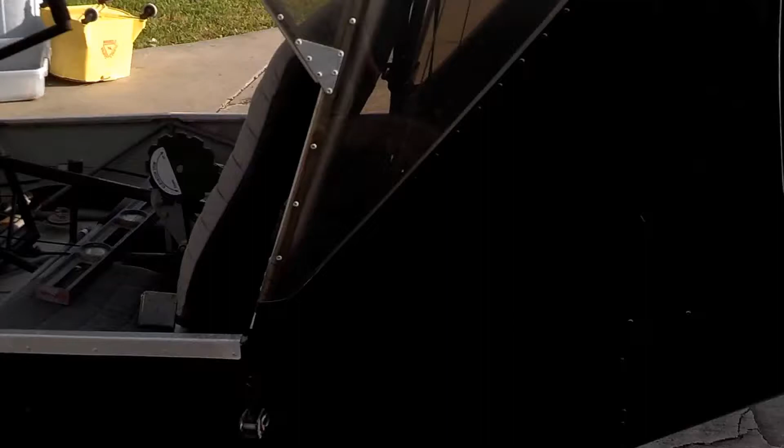So it's off at Rotax Rick's right now, and I've got the fuselage down here at my home in Houston. Usually this would be up in Kingsland where my hangar is, but it had some pretty good options. It has the Tundra tires, and the new updated Rans 9-gallon fuel tanks that go in the wings.

I'm gonna upgrade a few things while I'm at it, and this is already cleaned up, if that tells you anything about it, was actually really barn fresh is how I got it. The previous owner had built it. He was a spray pilot and wasn't really too impressed with the performance of ultralights and microlights.

I guess not after driving AgCat all those years. And so he actually just kind of let it sit. And when I came along and showed some interest in it, he offered to sell it, and I bought it from him. And the thing is that it needs a few updates.

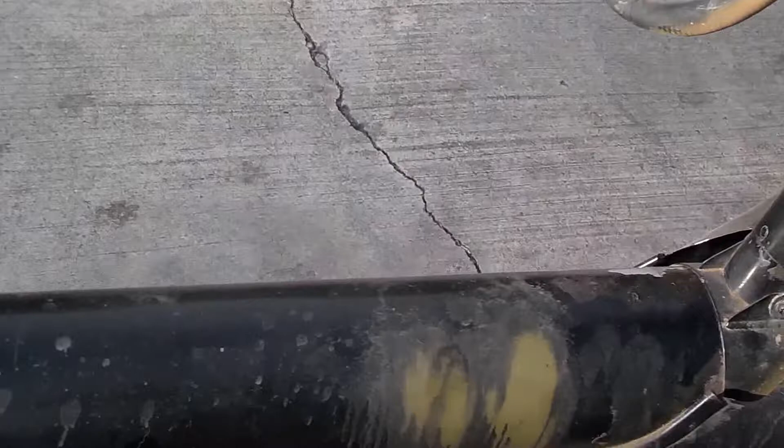The first thing I'm going to do is remove this tail boom and change it out. There's an airworthiness directive on this tail boom from Rans, and right here where it connects to the airplane, where this clamp is, there is supposed to be an aluminum tube shoved inside of this one as a doubler. What you do is you shine a light in there, and if you can see that sleeve, you've got the updated tube.

Well, I didn't, so I'm having to update that as well. So I bought the tail boom from Rans, and I've had it for several months, and I just haven't had the time to get started on it. But I just wanted to let you know it's going to get all new covering, a green and gray paint job and green and gray covering. It's going to be really nice. It's got Tundra tires, like I said. It's going to be a fun plane to fly, and that's about it for now. So stay tuned for more to come.

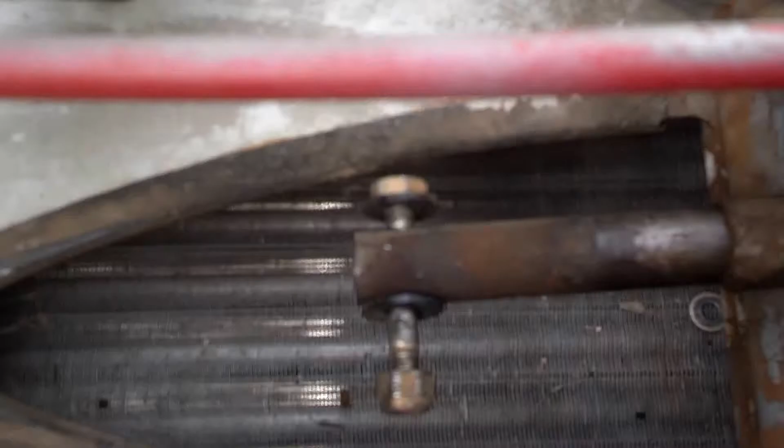Okay, I've been working diligently this morning to get the tail boom removed, and I finally did. It was a little bit of trouble, but it wasn't too awfully bad. The tail boom on the S-12 is attached in 6 places inside, right here on each side and here, and then 4 places that you can see right there.

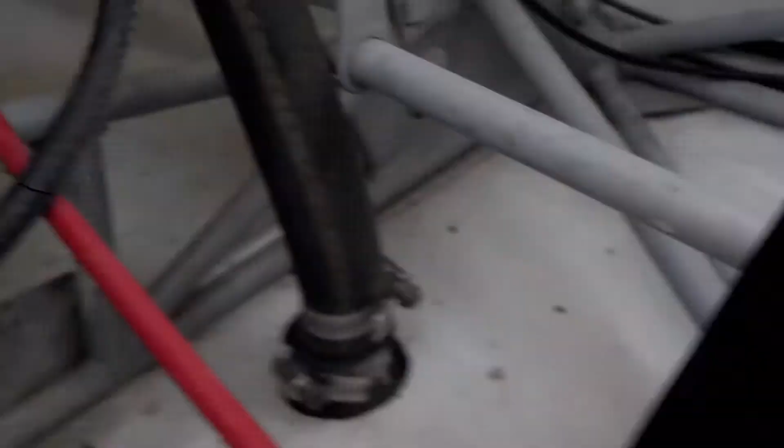And then back in the back, you can see it in the distance, is the clamp that has 2 bolts on the bottom that squeeze it together to get it out. So I have got that accomplished, and the tail boom is removed. Rans was nice enough to send me a new tail boom for only $850.

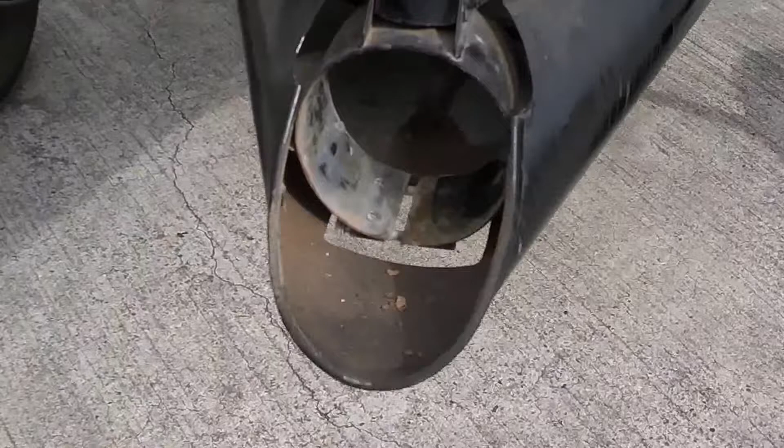If you look inside of this one, I hope you can see the doubler in there. We'll let the camera adjust. You can see the sleeve that's inside this tail boom, and that is what the upgrade calls for. Evidently, when you insert the tail boom and clamp it right here, that's a stress point. So if you have a hard landing, that tail has a lot of moment arm, and it could probably collapse that tube there.

I don't know that they ever had any trouble like that, but I'm assuming that's what the directive is about. I want to take a second to show you some things on the old tail boom. Inside where it was mounted, there's some nut plates in there that are riveted in that I'm going to replace. As you can see, there was some corrosion setting in on this one, so I'm glad I replaced it anyway.

And down here I've got to drill out those pop rivets, remove the builder's plate, and transfer all these holes to the new tail boom. I do have a building manual, an assembly manual for this plane, and so that is my next step.

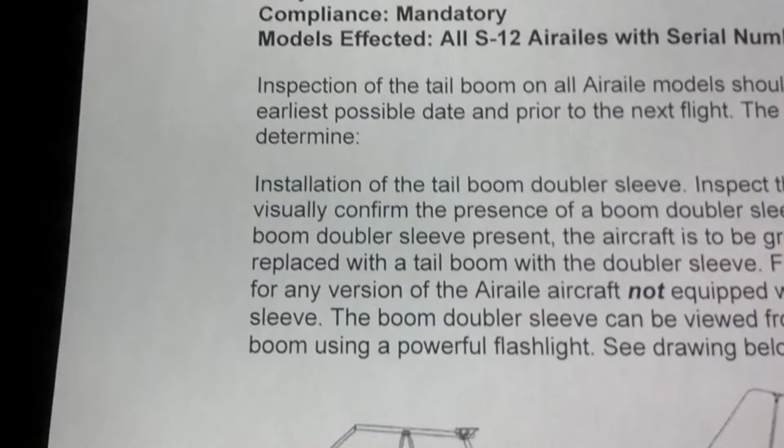I wanted to go into a little more depth on the tail boom for the RANS S-12. This is Airworthiness Directive number 131, issued in 2004 for the RANS S-12 Airaile. It says inspection of the tail boom on all Airaile models should be conducted at the earliest possible date and prior to the next flight. The inspection is to determine the installation of the tail boom doubler sleeve. Inspect the inside of the boom to visually confirm the presence of a boom doubler sleeve. If there is not a boom doubler sleeve present, the aircraft is to be grounded and the boom replaced with a tail boom with the doubler sleeve. Flight is not recommended for any version of the Airaile not equipped with the boom doubler sleeve.

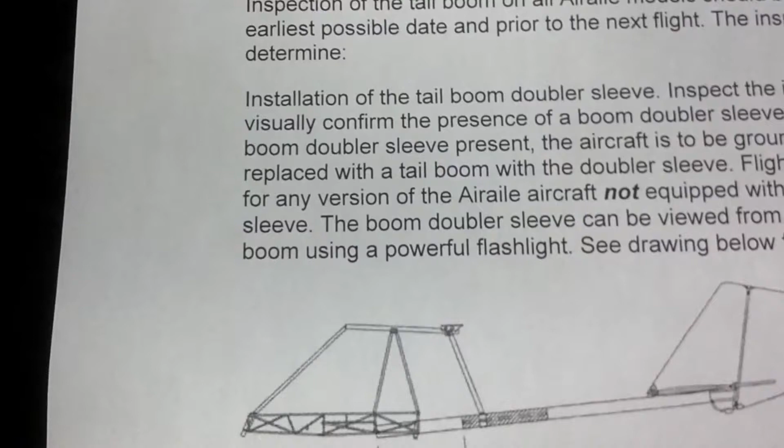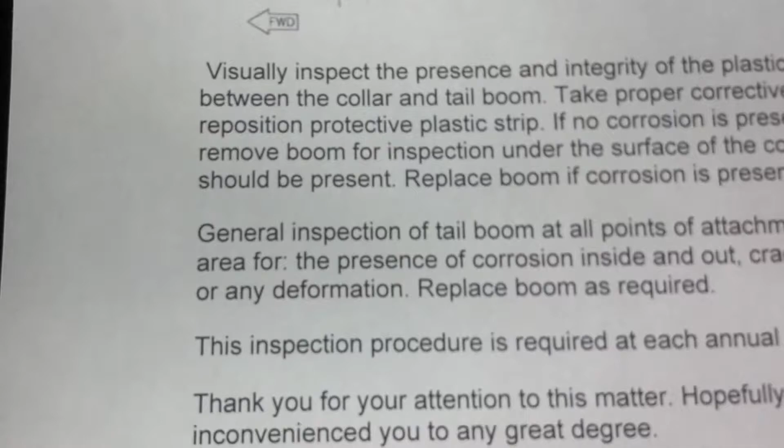The boom doubler sleeve can be viewed from the tail end of the boom using a powerful flashlight. See the drawing for location. This is a small drawing of where the boom doubler sleeve is located in relation to the end of the tail boom. In my earlier video, you can see that right where the clamp is is where the doubler is. They also want you to visually inspect the presence and integrity of the plastic strip between that clamp at the back of the body of the plane and the tail boom, to make sure it's in place and there's no corrosion under it.

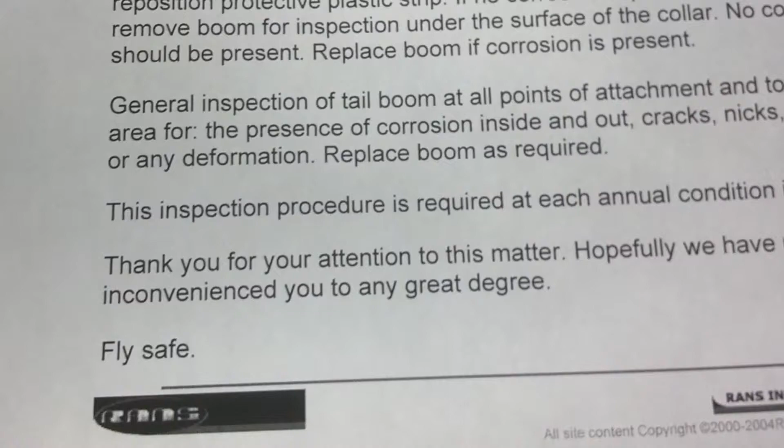I've located this Airworthiness Directive online, it's not hard to find. If you have a RANS S-12, or you're thinking about buying one, you want to make sure this modification is done, because it's expensive and time consuming to do. Thanks.

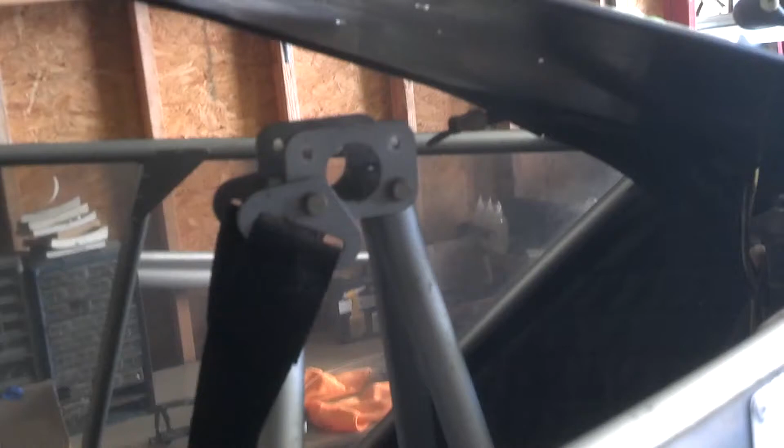As I got to looking at this, I found that my keel tube up here was fairly corroded, so I decided to go ahead and change it out. This is the old keel tube, and as you can see, just like that tail boom I showed y'all the other day, it's got corrosion setting in.

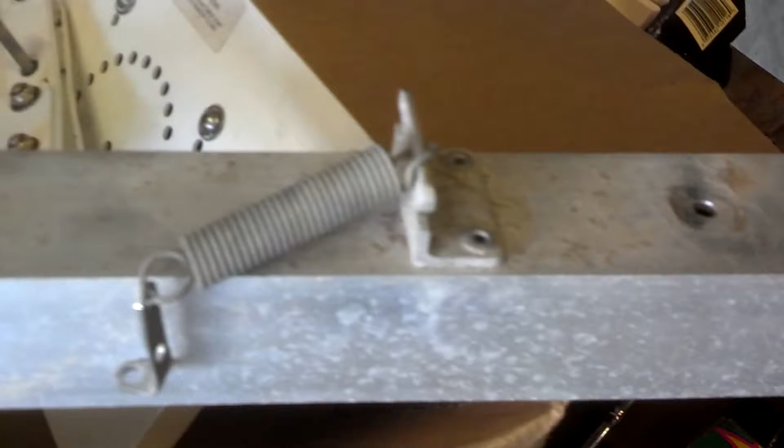I called RANS, and they said they don't anodize these, they sand them square. So if the corrosion wasn't too bad, I could go ahead and re-sand it, polish it up, and get rid of any of the corrosion pits.

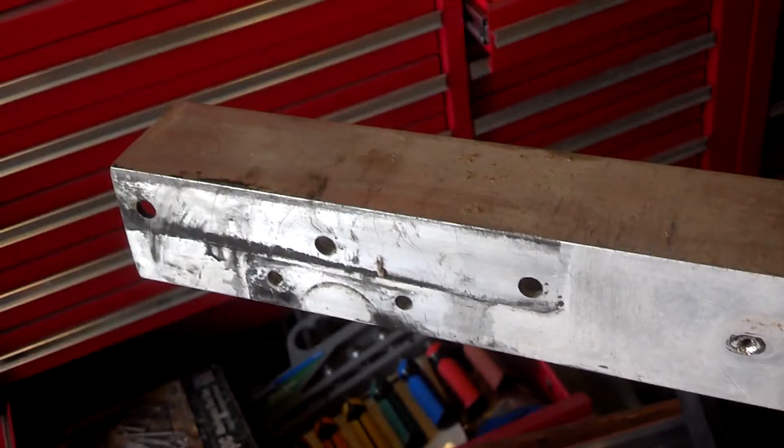Then I looked behind the voltage regulator where it was mounted, and that's some pretty severe corrosion. This is where the motor mounts down on this end, and the rear hole back there is where the wings mount in the back, where the trailing edge spar mounts. Up here in the front is where the leading edge spar would mount. So really everything that hangs on the wings hangs on this keel tube, which made me a little uncomfortable.

So I decided it was only $150 for a new tube, so I went ahead and sprang for one, because while the wings are off and everything's accessible, it would be a simple matter to do. Later on, after everything's in place, it would be a nightmare once the engine's on and the wings are on to try to remove this tube - it would literally have to be disassembled again. So I decided to bite the bullet on the 150 and go ahead and do it now.

So I'm waiting for it to come in, but here's the fruits of my labor - the motor mount removed. One of the things when you're working on a project like this, you want to stay organized. Everything I did is bagged, and every bag has a little note to me on it so I know what it means. Everything is in this box, in this bag, for reassembly.

I ran across a few fasteners that were questionable, and I'm probably going to end up replacing those. But for the most part, the rest of the structure looked pretty good - there wasn't any big problems anywhere else. I'm going to have to fit the parachute later.

But I want to do all this before I get it painted, because I want it to be done in the correct order. So anyway, that's today's work, and more next time.

I just wanted to share with y'all my 582 gray head that I sent off to Rotax Rick, and he returned it to me from Red Gold Rotax Rebuilds. This is not the motor that came out of my plane. My motor was kind of donated to him with another motor, and he sent me back this one, which is a Model 99, a blue head engine. But I opted for the gray head option because I don't fly where it's really cool, and unless you're going to fly in cold weather, that blue head can cause you more problems than it can solve.

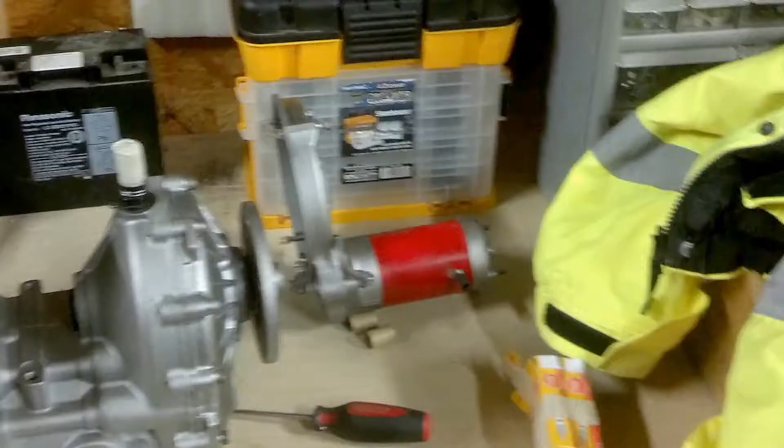This has actually got all the blue head upgrades because it is a blue head, it just has the gray head on top. This thing has double slotted connecting rods. He enlarged the oil feed passages. It's got a C gearbox, and I had the RK400 clutch system put in this machine so that you can start it without the engine being under load. It's also got the electric starter option.

But I just can't tell you how nice this engine looks with this stainless steel paint that Rotax Rick uses. I'm going to spin the motor around and let you see for yourself the quality of work that he did on this. It's just really impressive. So I'm going to spin this engine around and let you see the other side.

All the coils are just clean like new. The carburetors were all disassembled, cleaned, and shot with the stainless steel paint also. And all the wiring loom on this thing has just been wrapped really nicely. You can see what quality and attention to detail he took with my motor, and I can say right now, without even running the thing, that I would recommend his work.

What he told me was, if you like the way it looks on the outside, you're going to love the way it looks on the inside. So I've got to get the motor put back together. The only real problem I had, it was damaged a little bit in shipping, and this plug down here where that piece of tissue is, that was the oil feed line, or reservoir line for the rotary valve. It's made out of pot metal, and it got broken, so I've got to put a brass one in there. No big deal, I can screw that in myself. But all in all, this is just a gorgeous looking engine, which should give me real good service for years to come. I just can't say enough nice things about the way this looks.

It's just gorgeous. I also had Rick do the oil injection delete, as you can see down there, the oil injection block off plate. I'm gonna pre-mix my fuel from some bad experiences I had with Sea-Doos and other watercraft.

So anyway, that's it, hope y'all enjoy this. Anybody thinking about using Rick for a rebuild can rest assured that he really does do nice work. And you talk about great customer service, man, he'll tell you anything you want to know about these engines. He's very knowledgeable and very eager to share his knowledge with you and make you an informed customer, which I really liked.

No more crust and rust. He did a really nice job on the paint, I'm really, really pleased, and he painted the tail boom gray as well.

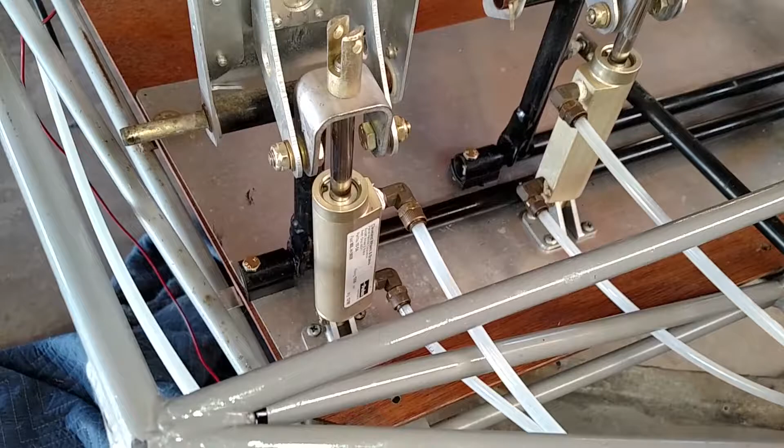Today I'm going to kind of catch y'all up because I've been working on it, and I'm not sure where I left off exactly, but I have been replacing the cable operated brakes with these nice hydraulic units, and I took them all apart and rebuilt all the Parker master cylinders and replaced all the fluid lines, and I'm at that phase. Unfortunately, this was a huge job.

I had to remove the belly pan skin, I had to remove the door uprights and the windshield, which I was going to replace anyway. The polish job that the guy did for me lasted about 6 months, and then the window started to get sticky, and I think the polycarbonate was just so UV damaged that it was not going to ever be good again. So I had already bought another brand new windshield, and I decided to go ahead and put it on.

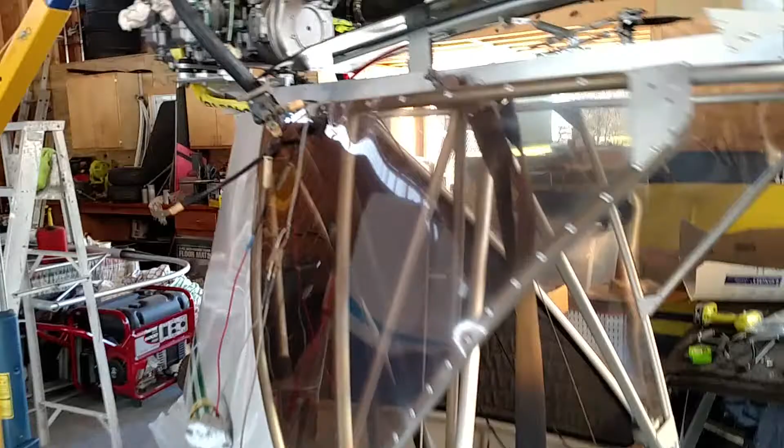Other things I've done since then: I've got the engine mounted onto the keel tube, and I've got all the plumbing done, the exhaust is mounted, and I've been mostly getting organized and prepared to work. As you can see, all the hoses are new. I've replumbed everything, and all is going well there.

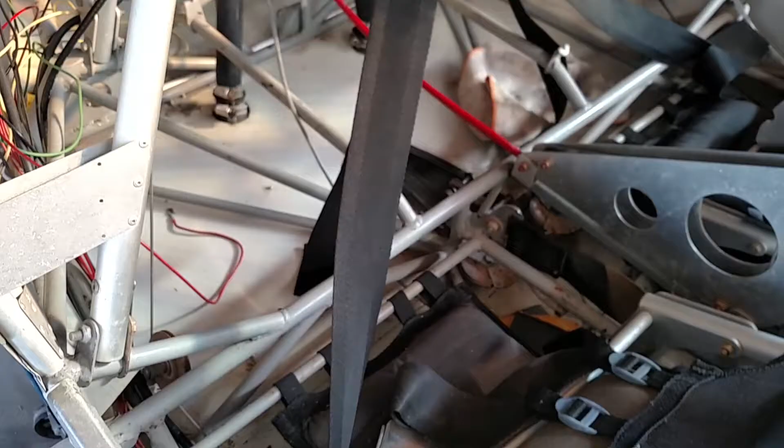But I hit a little snag today with the landing gear. All in all, opening this cage back up and just kind of opening everything up where I can get to it has been a tremendous help, because all the wiring and everything is exposed, and I'm going to redo some of that. So that's where I'm at today.

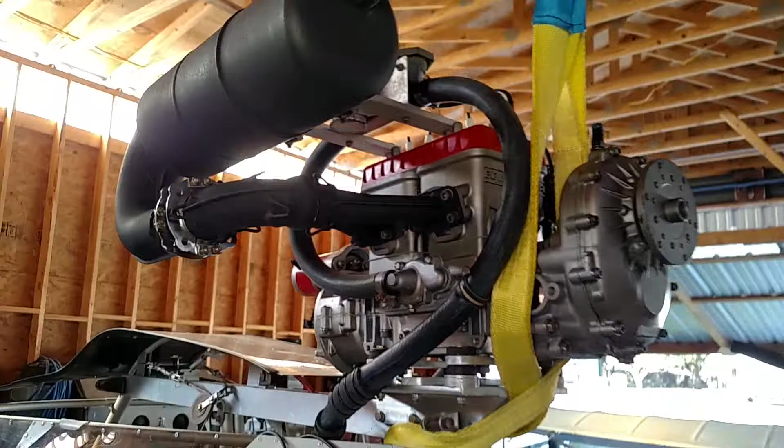I'll give you one more picture of the motor. It's my 582 in place, and the reason that sling is around there is because I'm taking the landing gear and putting the disc brakes on and taking the cable operated brakes off.

So that's about it for this time. It's starting to fall together, and I'm getting a lot more work done on it. I'll have another installment shortly. This is January the 3rd, 2016.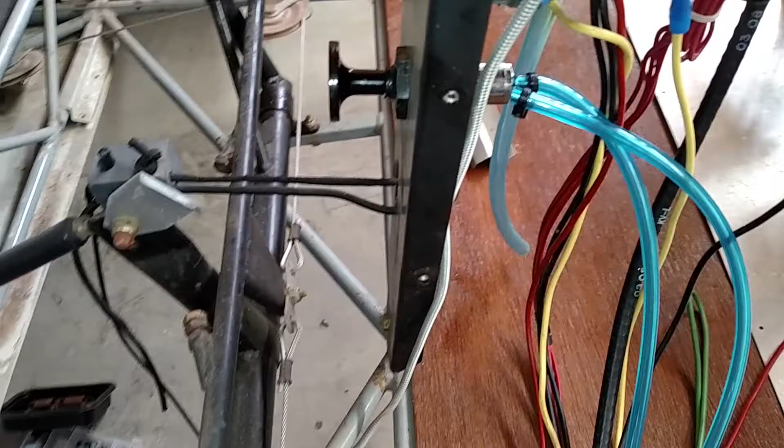I have got the battery box installed with all the hardware. I've got all the brakes bled and everything working good. I've got the primer installed, the new one, and the primer lines run.

I installed a gascolator, pretty similar to the one on my S14, except this time I used the gascolator's instructions, and it says at the top of the gascolator there's a port that you can screw a fitting in to access for a primer fitting. I thought that was a great idea, so I did it. That's my Facet fuel pump that I have not installed yet. That's next on my agenda.

Please excuse the bungee net, that's what's holding the nose of the aircraft on right now while I'm doing all this work. If you come around to this side of the airplane, what I've done so far over here is I've added these exhaust gas temperature probes, and I've added these exhaust springs for the joints in the exhaust pipes. And that's pretty much it.

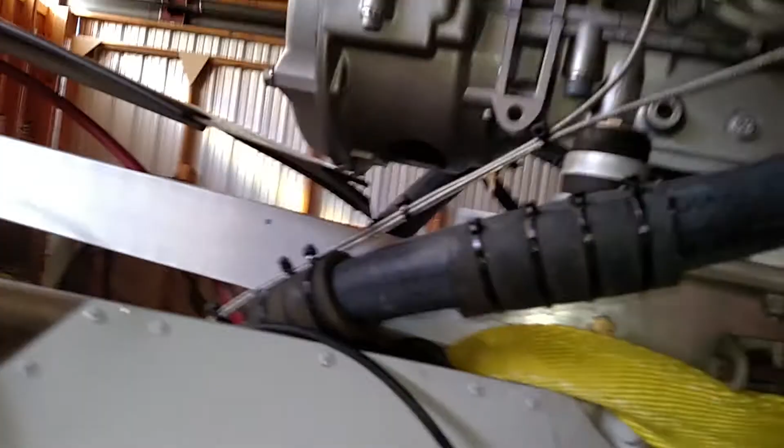I want to take a second to discuss the water cooling of this motor. What I got to talking to Rotax Rick, and we have determined there may be, or may not be for that matter, an issue with the way that the water cooling is plumbed on a Rans.

You see this big loop of hose here that goes up here and around this way, and there's a filler neck up there that you use like a radiator cap. Then it comes down this hose and into this water pump here. It goes up through the cylinders, up into the head, and then on the other side of the motor, it comes out of the head here, and it goes back down to the radiator down below the plane.

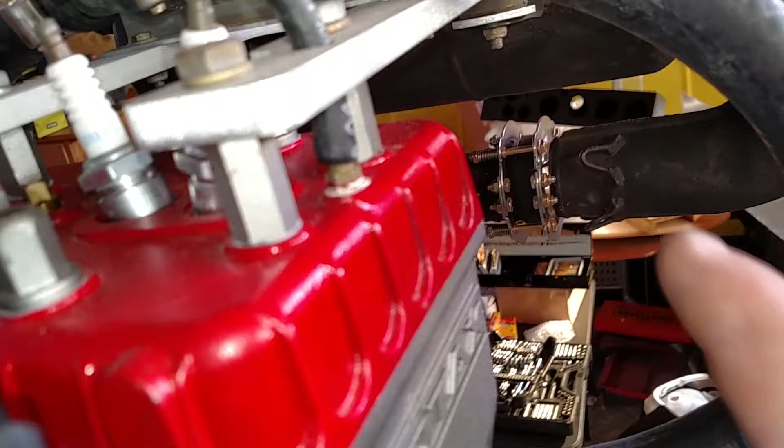The potential issue is caused by this steam line right here. Now, when you quit running a Rotax motor, the hot head can continue, without water being circulated, to form steam pockets. That's why they call this a steam vent. Here is the steam vent fitting that Rotax puts on there, and it sends the air, when you start up, blowing it up through this line and back into the filler neck. The issue is that this is the intake side of the water pump, so you could potentially run air down into your water pump and cause a cavitation problem.

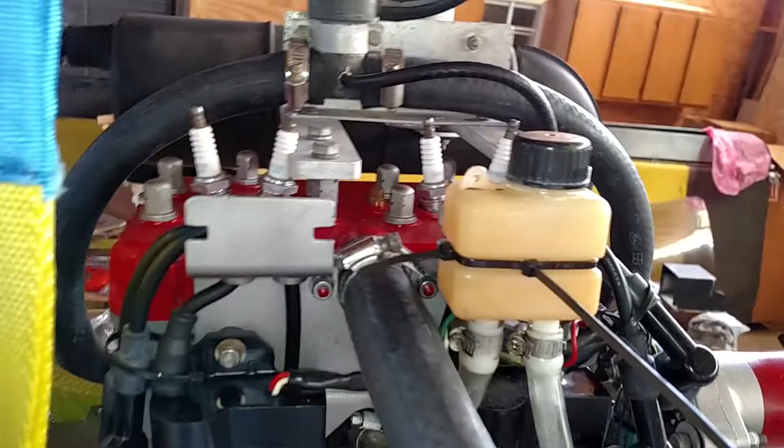Rotax Rick is claiming that is a problem. So what he is suggesting I do, and after investigating it myself, Rotax does recommend that you put the expansion tank on the head side, or the output side, of the motor.

So I'm going to use one of these little Rotax expansion tanks, and get the 90-degree fitting option. This one's just straight out, but you can get one that goes 90 degrees up. I'm going to put this here and do away with this whole loop of hose over here, and go straight into the water pump from the radiator. That will eliminate any potential of air getting into that water pump impeller and causing a problem.

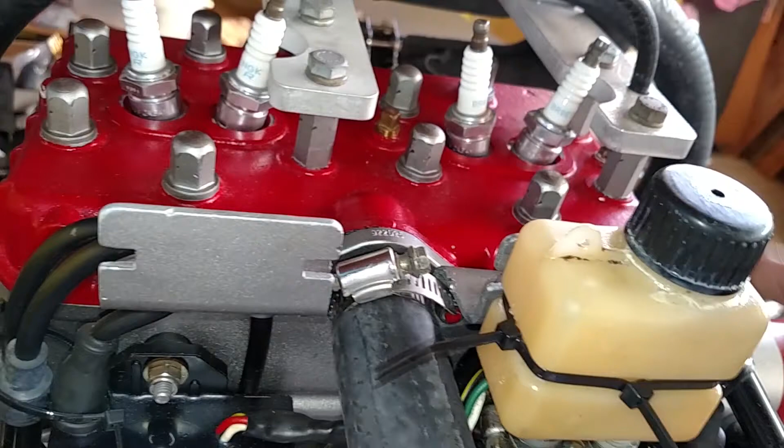Now, for you naysayers who say there are a million Rans S-12s and S-14s flying with this setup and no one seems to be having any problems, well, that may be true. But as Rotax Rick described to me, the most vulnerable part of the head on a 582 is an O-ring. If you have a pocket of air around that O-ring without water to cool it, it can fry that O-ring, and it may not fail immediately, it may take a while.

And so then your engine fails and you blame Rick, or you blame somebody else, when it's actually a faulty installation. So I'm trying to point this out so that maybe it'll help somebody, and they can do what I'm going to do, which is rectify this before it ever becomes a problem.

If you want to use this information, great, but I suggest you research it yourself and come to your own conclusions. If anything I've said here is helpful, well then great, but I'm not a master Rotax guy or anything like that. I'm just telling you what I'm doing on my plane. So if you follow what I'm doing and burn your engine up, don't be mad at me. You still need to do your own research.

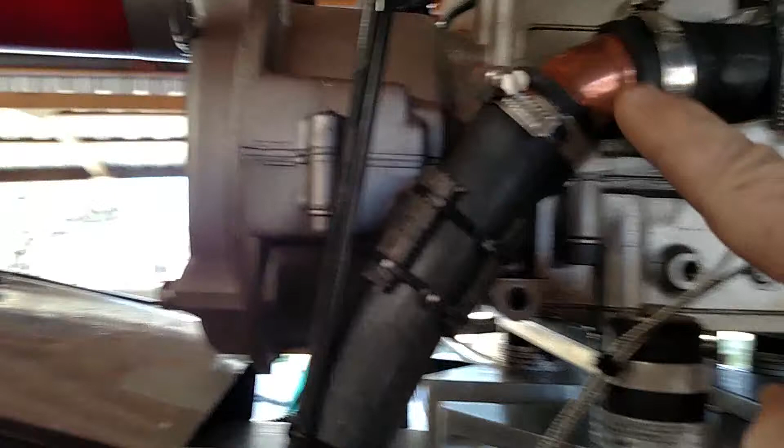You can see right here, this is the tube that comes in from the radiator on the bottom of the S-12. I've got a 1-inch 45-degree copper fitting here, and it goes into the water pump, which is right here. Before, that line would have traveled up here and around on top of the head, then looped back around and come in this way. This way it just does away with that big old loop and the possibility of getting air into your system.

So let's go around to the other side again. What I did here is, where the line used to come straight out and go right down here to the radiator on the output side of the head, I've replaced the fitting that Rans had here, which was straight out, with a 90-degree fitting, and it goes up with a little piece of 1-inch radiator hose to my Rotax expansion tank, and then it goes over here.

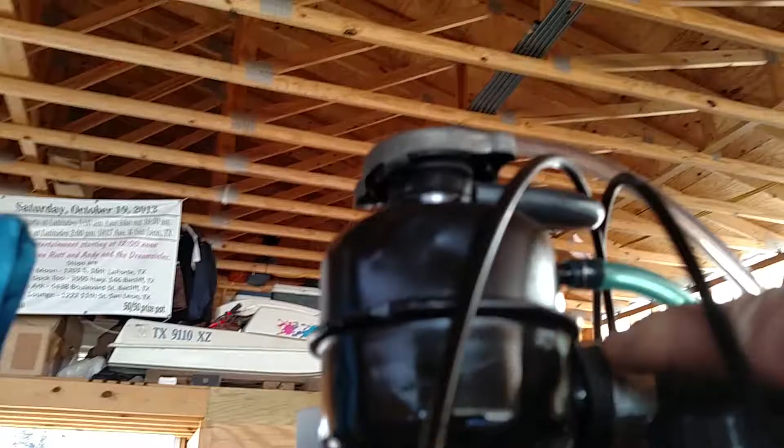This is a 1-inch 90-degree copper fitting, and then it goes straight down here, and this goes down under the plane to the radiator underneath. That's a proper cooling system.

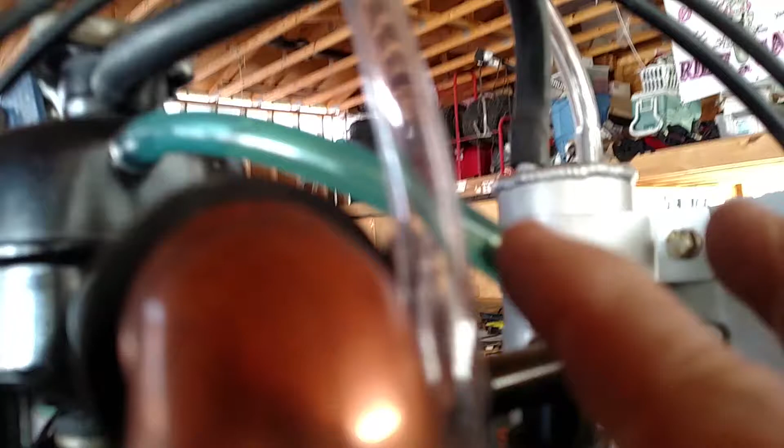The steam tube, the steam vent now comes off the head, goes up here. I put a connection here so that I can have this clear tubing. Rotax Rick claims that you can see your coolant level here without ever having to take the cap off. And so that goes into the steam vent fitting here to the top of your reservoir, and then this line up here is an overflow. So if you get too hot, it blows the coolant out this hose and back down. I use the stock Rans reservoir here. But that's my setup, and I hope y'all can take something away from this.

I've got quite a bit done on it. I've been working really hard, so I'm just going to hit you with the highlights of what I've got done since the last time. I've got all my cooling system redone. I've got the throttle cables run for the throttles, and I've got all of the mechanical synchronization done.

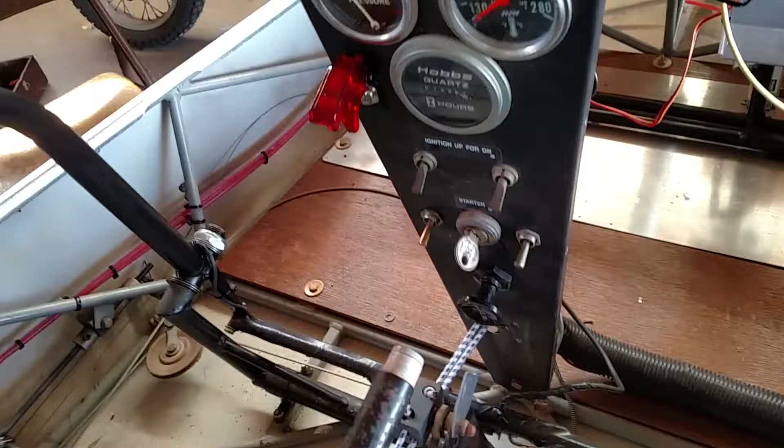I've got the Key West voltage regulator wired. I've of course got the BRS parachute put in. I've got my antenna for my aircraft radio installed and the wires run. I've got the larger dash installed with most of my instrumentation, and I've got all my switches run for the fuel pump and for the radios and the master solenoid switch.

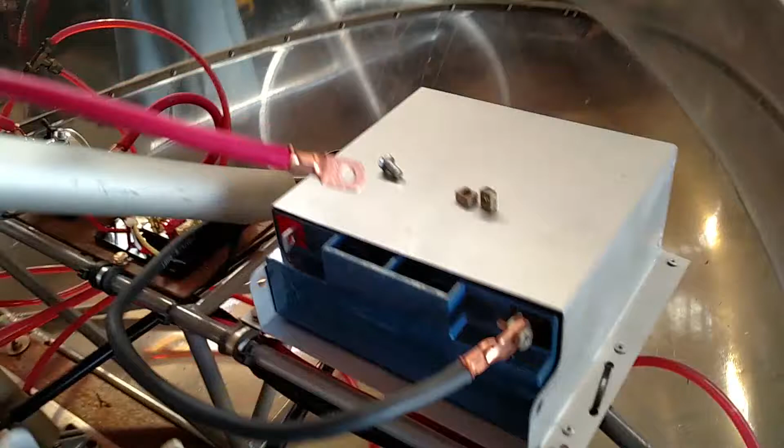I've run all the new tubing for my airspeed indicator and got all the primer lines run from the last time. Got battery cables run, master solenoid in, fuse box in. Of course the hydraulic brakes are in and working fine. I've got the belly pan back on the machine again, so that part's done. The nose cone is resecured, and so the machine is starting to look whole. I've just got to put the uprights for the doors in and the doors back on to be complete with that.

Now I took the seats off that other Rans that was donated to me because the fabric was in better shape. This one has a couple little tears in it, and I took them home and washed them, and I'm going to be exchanging those later.

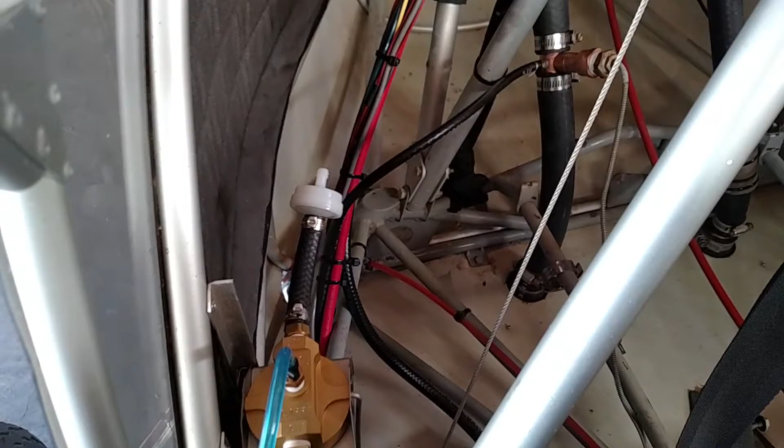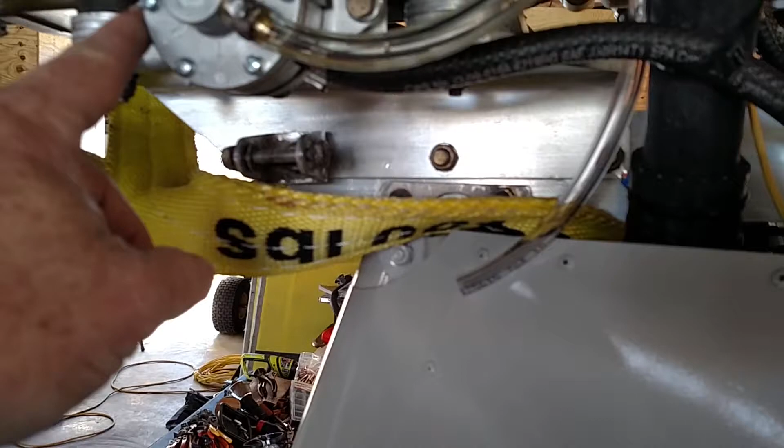I've also got the fuel pump done and all the fuel line run, and I've got it all stubbed into this filter right here for where the wing tanks will dump into the system. So the wing tanks are going to come through this filter into the gascolator where it's filtered again. It's going to go down through that hose down to the electric fuel pump, and then it's going to go out there and up to the pneumatic fuel pump here. And then from there it's going to go through these two lines to the carburetors. This is the pulse line.

It's run. All the wires are hooked up for the magnetos, for the kill, for the tach. Everything is working. I also have the starter solenoid mounted and wired and flyback diode installed.

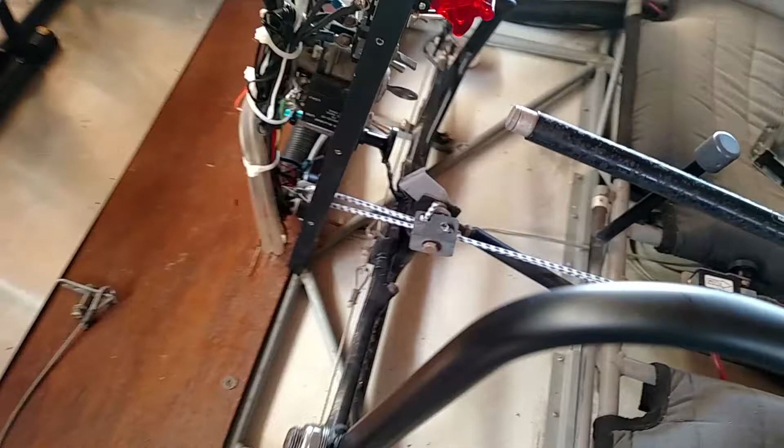And that's, oh, I got my control sticks put in with push to talks. I've got that all wired and run and ready for my radio.

So I also installed this little voltmeter. Now it doesn't go there, I've just got it sit there. When this is all put back together, it's going to end up going right there. But that's a little show chrome item. It's made for Goldwing motorcycles. It's got a clock, a timer, a voltmeter, an outside air temperature gauge, and an ice warning indicator. It's got a lot of neat little things. It was about $14, so I'll enjoy that.

I also opted for a second hour meter, and this hour meter is going to be for engine hours.

Okay, I've got my dash installed. Everything but the radio, I'm waiting on a power supply. I got my voltmeter in, everything operates correctly. I've also got a 12-volt power supply here for a GPS to plug into, a cigarette lighter plug basically. And so I've got that done. I've also got the cylinder head temperature probes in up there, as you can see underneath the spark plugs.

So my cylinder head temperature gauge should be correct.

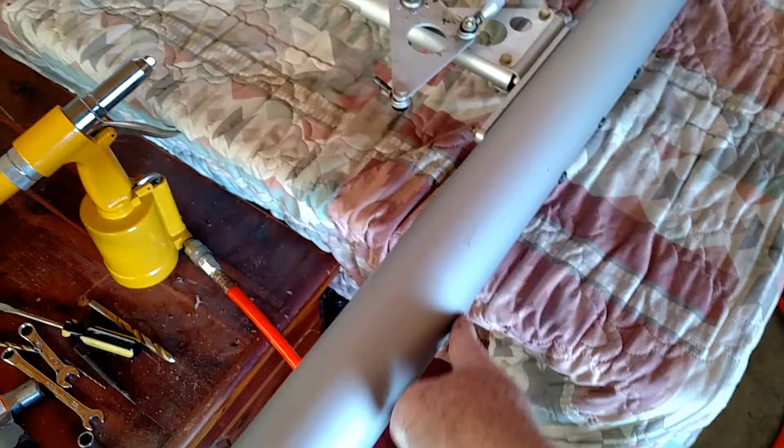Now for the wings. This was the worst wing. It was a mess. Right over here I had a big old dent in the leading edge of the wing, so I bought a new leading edge spar from Rans.

And then a guy gave me an airplane, an old derelict S-12. It came with old yellow and black wings, a tail section, a tail boom and a few other parts. The airplane was junk, but that's where I got my hydraulic brake setup from. I robbed the trailing edge spar out of one of the wings, because whatever he hit up here caused it to bend down in that far corner.

There was a very slight bend in the trailing edge spar. The reason I unskinned these was because the guy had just reskinned them, hadn't even put the wings back on, and the wind came up and knocked one of them over. It landed on a pile of metal sticking up, and it just shredded the wing material. He got pissed off, and that's why he sold it to me to begin with. He just got mad at it.

So I took the skins off, and while I was doing that, I decided I was going to go through all the wings and do all the updates that Rans recommend. So I'm going to go over a few of those with you.

But first, I'd like to tell you that these are the fiberglass gas tanks that come in the S-12s and S-14s. These are real easy to spot because they're gray fiberglass, and they're great unless you use ethanol fuel. If you use nothing but 100 low lead, these will be just fine. However, I'm not sure that's what I'm going to do, so I decided while I had the wings apart, I was going to go ahead and change those anyway.

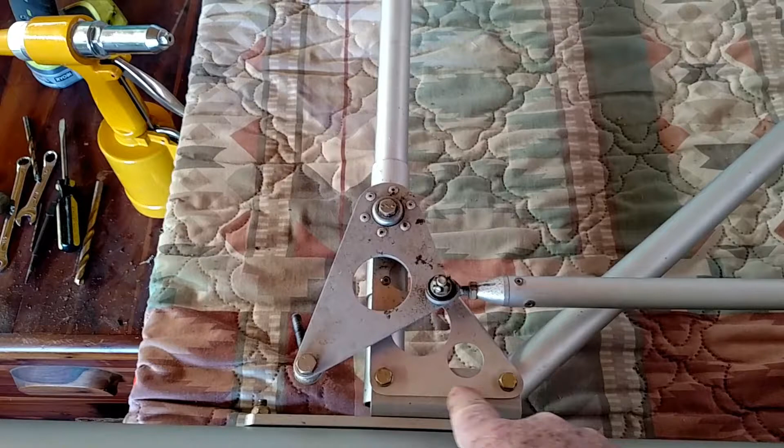One of the things I wanted to show you is this airworthiness directive on the aileron bell crank gusset. This is the gusset right here, this piece of metal. What Rans tells you to do, since you don't have the material on already, is when you build it, you put a pop rivet in there, because evidently this flimsy gusset, if it gets in a bind, can bow up and grab the bottom of this bolt head, and your ailerons can become inoperative. So the fix is to tie wrap this piece here to the spar, which keeps it from bowing. But if you're building it, you can simply put a pop rivet in there and it solves the problem. So while I had these apart, I did that.

I'm also going to run the threads on this end all the way. Haven't done that yet because I want to do it when I'm rigging the wing on the plane. But there's an airworthiness directive about these push-pull tubes also. Basically, one of them had come undone on a guy who didn't do it properly, so they want this ran down on these threads as far as you can get it and still be able to rig the airplane. I'm going to do that as well.

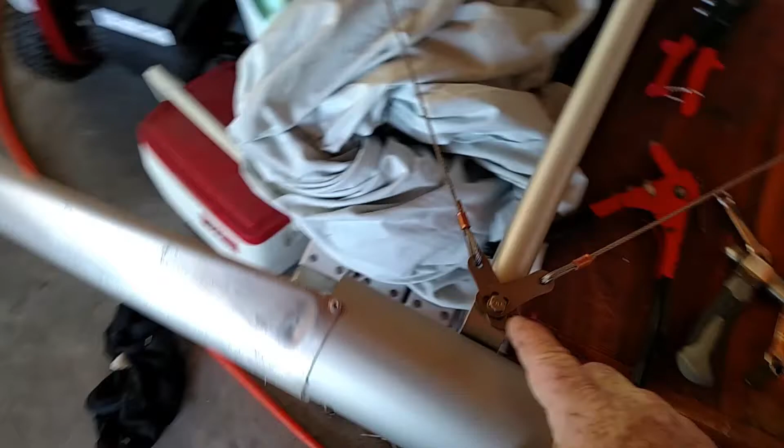One of the other things I did was switch to the Rands S-12 XL style wires here. They go and triangulate the tips of the wing. There were tubes in mine, but when I called Rands and asked why they switched to wires, they told me they had opened up several wings and found the tubes broken, and people had been flying around with broken tubes and it was no big deal. So they just decided to go with cable since everything was under tension anyway. So I upgraded to that as well.

So that's it for right now, but I do have this wing structure completed other than the fuel tank, which I'm going to work on in the next day or two, and then I'm going to start skinning the wings again. So that's it for now.

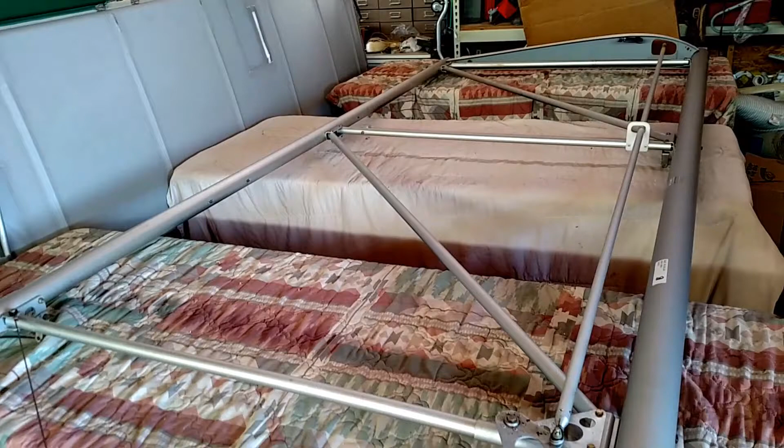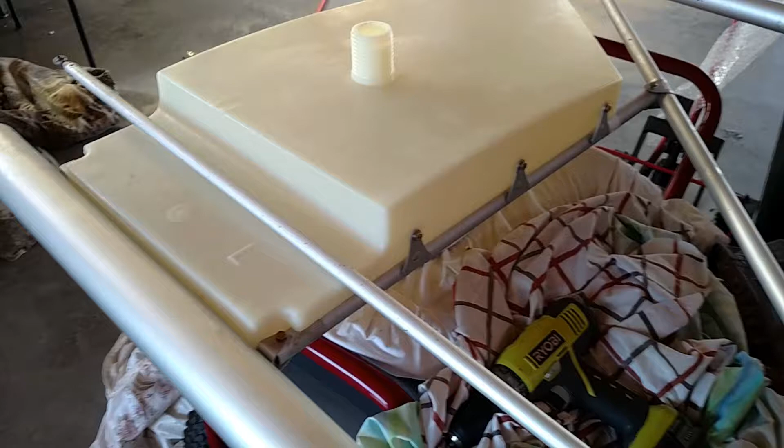It's February the 17th, and time for another update on the S-12. So today what I've done is I've got the covering off the left wing, and I have replaced the wingtip wires that brace the outer two spans on the wing. I completed the airworthiness directive on the aileron bell crank, as you can see the pop rivet in there. And I've replaced the old fiberglass tank with the upgraded polyethylene tank.

So you can see how this tank is put in is a little bit different. I had to remove a rail and drill a few holes and mount some brackets, but it's a better tank. It'll stand up to the ethanol fuels, and so this is what it looks like. I had to locate and mount several fuel fittings for the project and drill them out. There's one under here also.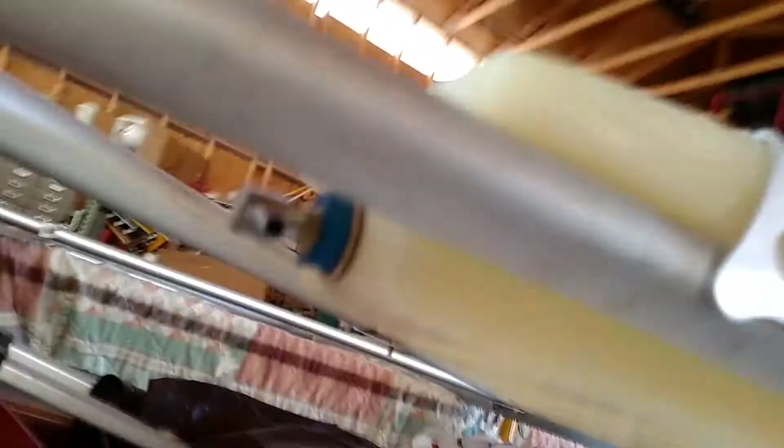The big thing that I got done today was I got the right wing put on the plane. This doesn't have any skin on it or anything, and this is going to be part of the rigging process where I level and adjust the wing and add the washout to the tips, and then also set the flap and aileron where they need to be. There's a procedure in the manual for doing that, and I want to just kind of have a dry run here.

But I got my compression, the main struts in. I don't have the smaller struts in yet, but these are painted gray to match the plane. Pretty awesome. Anyway, I also have got the radio installed in the dash. That's what it's going to look like.

Here's a little hint. You notice the windshield isn't in the airplane and the door posts are not in. The reason why is because, do you see that bolt right there for the forward leading edge spar? That's a bitch to get in if you have the windshield in. So I left the windshield out. And you can see it's kind of tight in there. There's where your aileron bell crank attaches.

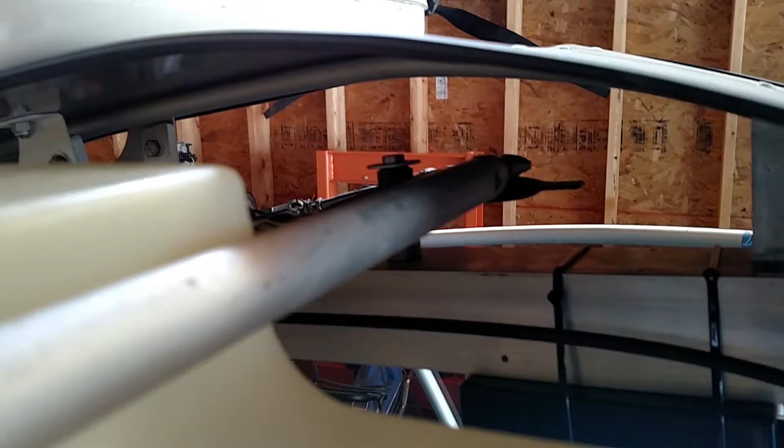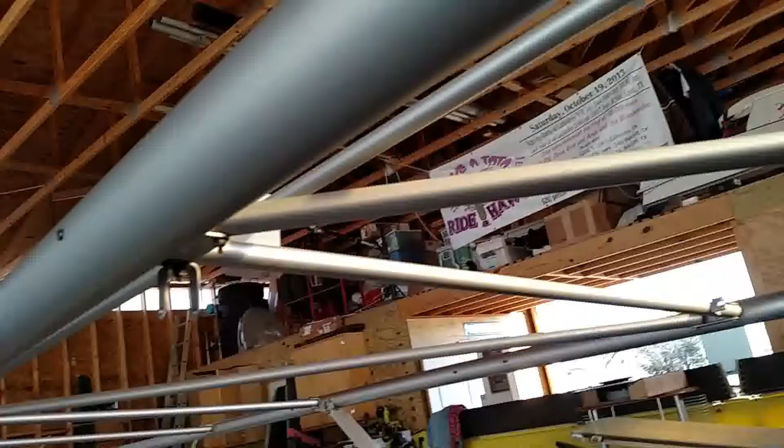And so I don't have the first wing rib in there, that big fiberglass rib that tensions everything. I just wanted to put the wings on and get them set. I put the fiberglass struts, the fiberglass root ribs in later. But it's just kind of an idea of what it's looking like. You see all the compression struts and the leading and trailing edge spars and the main struts.

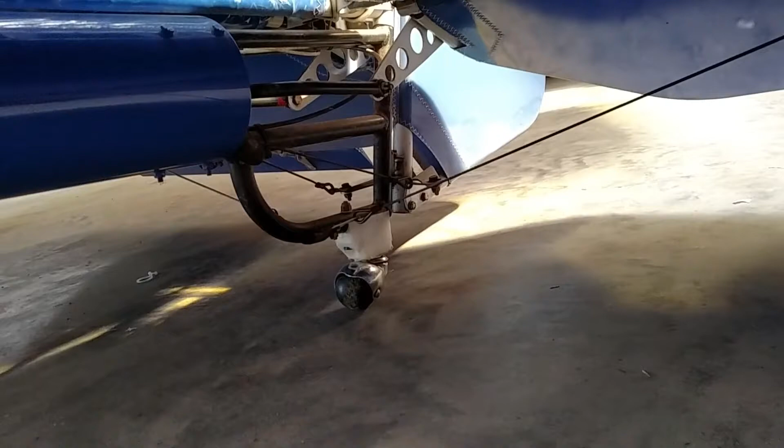The newer style is like my S-14, and I'll show you the difference. The newer style, the tangs attach on the top of the surfaces, and they go through, and then each one of these cables here attaches to a different point. There's a hole up here in the tail boom that's got a threaded insert, and then the other one goes back to the tail boom extension bracket. And so that's the way I had built mine.

And so I'm short a cable, and I ordered it from Rans today. Rans actually makes an upgraded cable for that still installs in the front, but goes to where this bolt is sticking out, which is right above where the vertical stabilizer attaches.

So I'm waiting on parts again, but one interesting thing I found while I was skinning these was that the former owner had put the horizontal stabilizers on upside down. These have an inverted airfoil, which means the airfoil portion of the horizontal surface is on the bottom. So if you look at it, they're relatively flat on top, but on the bottom they have all their aerodynamic surface. And evidently it doesn't make too much difference because he flew it 40 something hours like that.

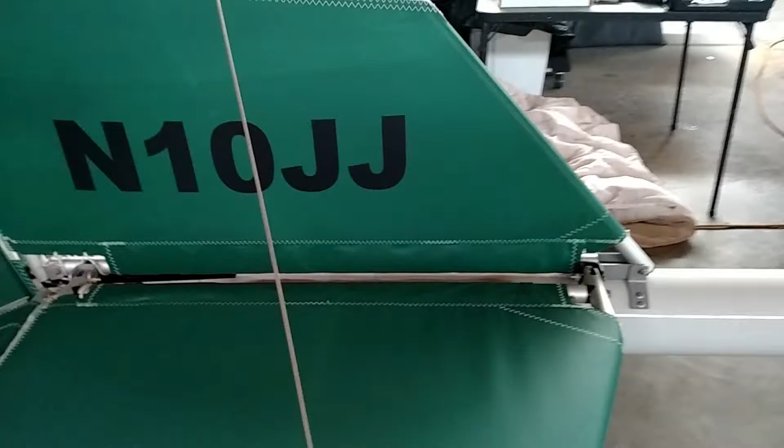I did get in my N numbers, and I test ran the motor. I'll have a separate video on that. And for all you Rotax Rick's fans, I'll tell you that it ran flawlessly, no problems.

But there's just a quick walk around. Looks great. Got my pre-mix stickers on there. Everything is

All right. I'll give y'all one more update in this series, and that will be the day that I fly it. I still need to do a weight and balance on it and check everything, go over all the nuts and bolts, and then I'll let you see the maiden flight, and then that'll be the end of the series.

Get away, Walker. I got the tail boom installed this morning. I got it clamped there at the base, and I got all the bolts inside tightened up, the 2 there and the 4 there, and then the clamps in the back.

It wasn't that big of a problem, but there was no way to do it without scratching the tail boom inside, because you're sliding it through metal. I tried Vaseline and everything else, and just was no way to prevent that, so I'll have to do some touch-up painting. But I got the boom on.

Of course, I got the push-pull rod in for the elevator here. I got this tail boom bracket in the back partially put on. I got the 2 bolts in the bottom, and then I've got to drill 2 here and 2 on the other side. But with it like this, you can move it just a hair.

So what I wanted to do was just double check and make sure that the alignment of my vertical stabilizer, and I've got it approximately where it needs to be, and you can see, man, that bad boy is dead on straight. So I'm really happy with the alignment, so I'm going to go ahead and drill my other 2 holes. I'll probably do that tomorrow, and then start reskinning the tail.

I know I said I wouldn't have to look at that nasty pink and black, but I got to look at it one more time because I set that up there just for a visual aid, really. Anyway, that's it for today. Take it easy, YouTube.

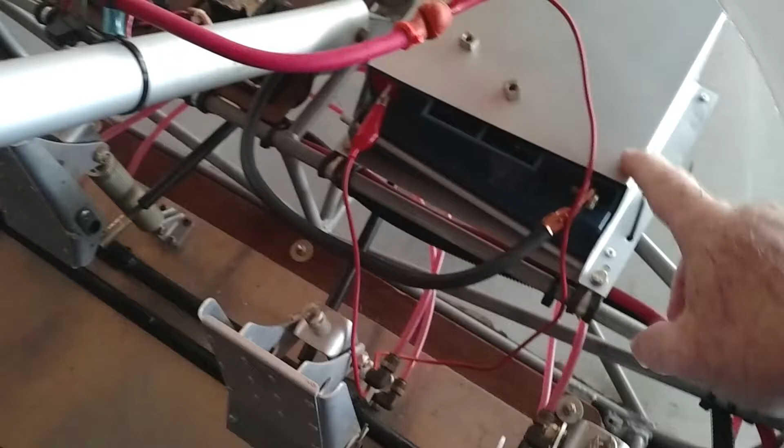I'm going to put a new Odyssey dry cell battery in here, so I've still got to do that. I've got all the lift struts and jury struts attached, and new AN hardware on everything. So it's looking really good. I got the flaps and ailerons adjusted, so you can look down that and see that they're nice and straight. Everything looks real good.

All the control cables and push-pull tubes are installed. I got the gas caps built and installed. And so what I've got to do now is put the new tail boom on.

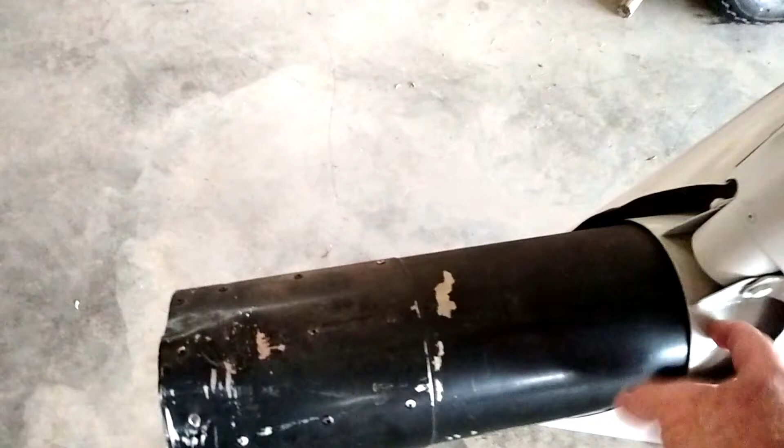This is just an old piece of tail boom that I cut off to glue the liner in here so that I could clamp it and make the liner smooth, so I don't have to fight it when I'm putting the new tail boom in. But here's the new boom. This is the one I got from Rand.

The guy that painted my plane also painted this.

I've got the initial holes drilled here, and I'm going to attach the vertical stabilizer bracket about here. I'm going to wait until I install the vertical stabilizer because I want it built straight to my airplane, not in some arbitrary hole dictated by the manual. This is my pile of skins for the tail, and my tail feathers are over here on the bench waiting to be recovered. Thank God I don't have to look at that pink and black anymore. But that's where I'm at right now, March the 30th. I'll give you another update as soon as I make more progress. It's coming right along, really starting to look like an airplane again, finally.

So I'm waiting on parts again, but one interesting thing I found while skinning these was that the former owner had put the horizontal stabilizers on upside down. These have an inverted airfoil, meaning the airfoil portion of the horizontal surface is on the bottom. So if you look at it, they're relatively flat on top, but on the bottom they have all their aerodynamic surface. Evidently it doesn't make too much difference, because he flew it 40-something hours like that.

So anyway, that's it for today. I'll give you another update as soon as I get the control surfaces put on and all the cables connected, and we'll go from there.